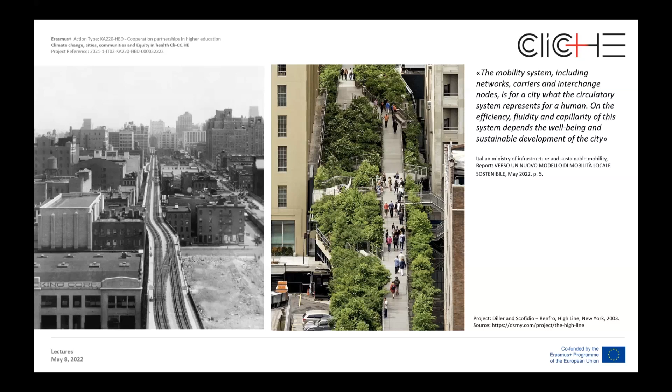My contribution, therefore, will discuss the practices of urban regeneration that start from the city's circulatory apparatus to revitalize its entire system. I will show two water infrastructure projects converted into new systems and new mobility. These two projects are about 20 years apart and work on a linear infrastructure and a port space. Both infrastructures relate to the theme of water and spaces of artificiality.

On the one hand is the regeneration of the drained riverbed of the Turia River in Valencia, an urban stitching between the city's historic center and an expansion area. On the other hand, we find the regeneration of Copenhagen's port infrastructure, in which the city, starting from the historic center, gradually expands to colonize, evolve, and claim its relationship with the sea. These two examples show different strategies of intervention within existing urban tissue.

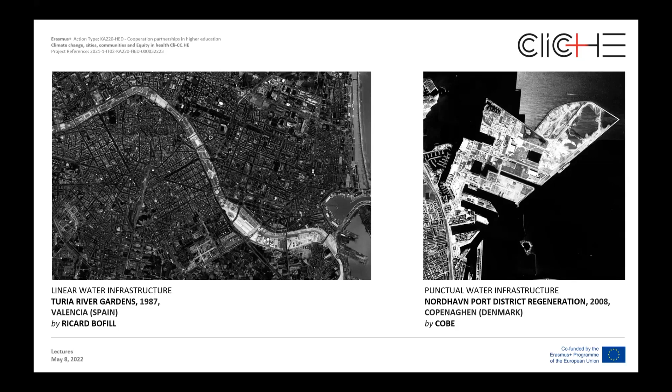The first project is the Turia River Garden, situated in Valencia, a city of Roman founding that is deeply linked to the waterway. Since the foundation of the city by Romans, Valencia has developed around the river. However, a river that over the centuries has caused numerous violent floods. The last and most violent was in 1957.

Valencia is subjected to devastating floods that forever changed the city's relationship with the Turia River. During this catastrophic event, nearly three-quarters of the city is submerged in the flood, and 81 people lose their lives.

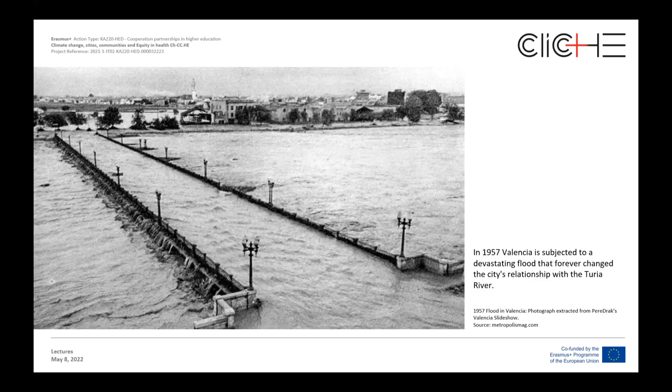After this crisis, it was decided to implement an ambitious plan and redirect the course of the water to the south of the city, the so-called Plan Sur, in English the Southern Plan. The Southern Plan was completed in 1969, and the course of the river that gave birth to the city was pushed out of it.

The deviation of the Turia River was done to remove the danger over the city from the seasonal flooding of the river, but left a wide strip of land running through the city from west to east along the historic city center.

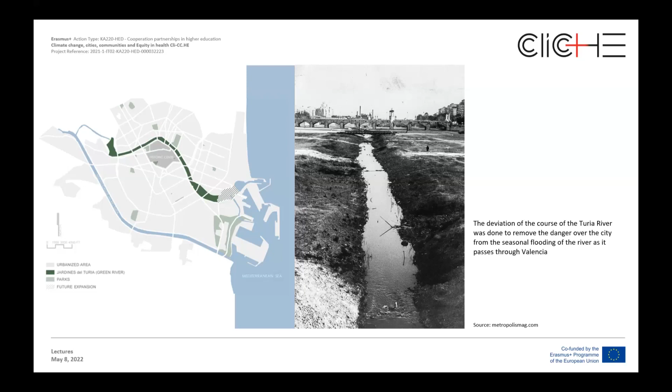This demonstrates that in urban regeneration intervention, acting over the common space and landscape, in addition to gathering financial resources or political desire, opportunities should be found to carefully adapt the landscape system to the perspective of the urban community settled in the place.

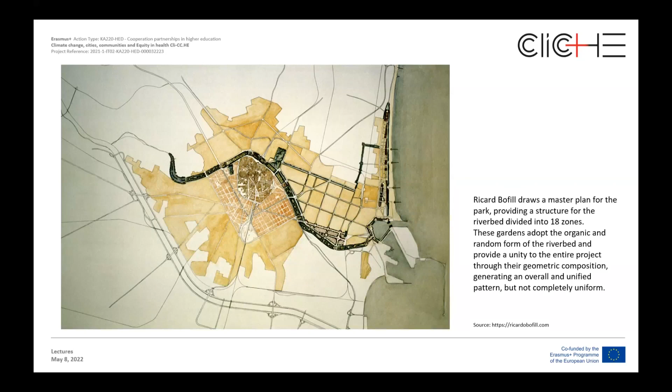Therefore, Ricard Bofill drew a master plan for the park, providing the structure for the riverbed divided into 18 zones. The design of a green space in the dry Turia riverbed first required an understanding of the city as a whole, its structure, forms, and functioning. The city as a framework for the intervention, and the riverbed as the city spine, were two basic concepts presiding over both the urban analysis and the design of the proposal.

The concept developed for the garden of the park is based on a philosophy of natural balance between resources and design, with a view to environmental sustainability, even though we are in the 80s.

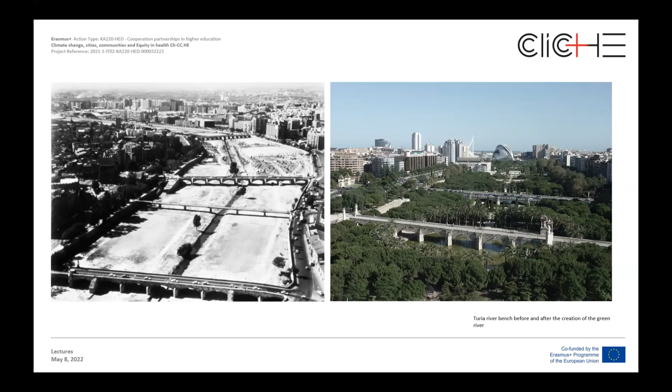The various areas of the park create different hierarchies of effects, and the vegetation used is local, such as pine, orange, palm, and olive trees.

The garden begins with a fruit forest and a lake that serves as both an irrigation reservoir, but also allows for sport and recreational activities.

In the middle of the park, there is a forum for the city. This is the main space where large festivals, shows, and parties take place.

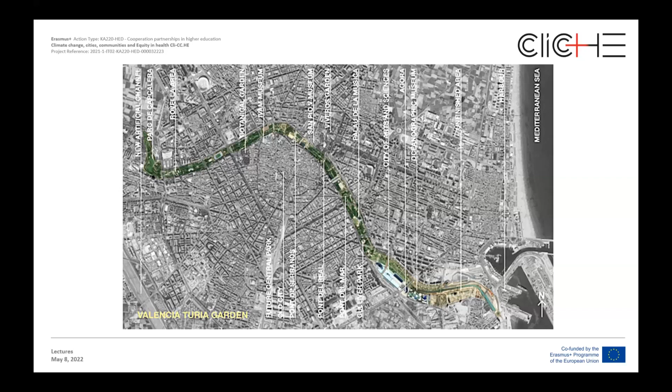In addition to the green and blue infrastructure, iconic buildings have become symbols of the city, which are the buildings made by the architect Santiago Calatrava for the City of Arts and Sciences Pavilion.

30 years after the project's realization, in 2017, a data team estimated the annual economic benefits to the city of Valencia represented by the Turia Park.

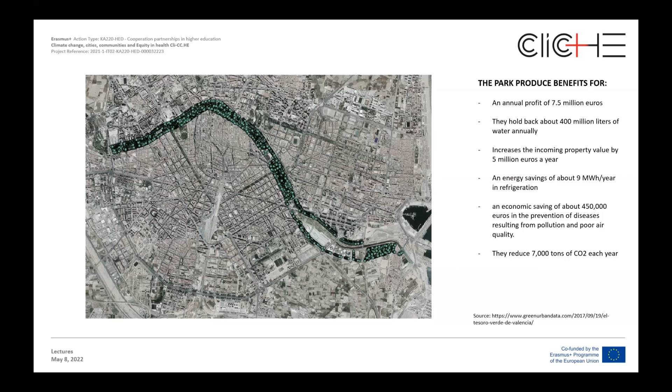Despite the time spent, this project is a fascinating modern example of the transformative effect of landscape infrastructure on a city's identity and well-being.

Born out of a crisis, Valencia has managed to integrate a recreational and soft mobility infrastructure network with its historical roots and surrounding neighborhoods. It's now difficult to imagine Valencia without its green river.

That project is in Copenhagen. Copenhagen is a city that met the challenges of climate change in an exemplary way over the past 13 years.

Among the various interventions made throughout the city, we focus on the regeneration of the port infrastructure.

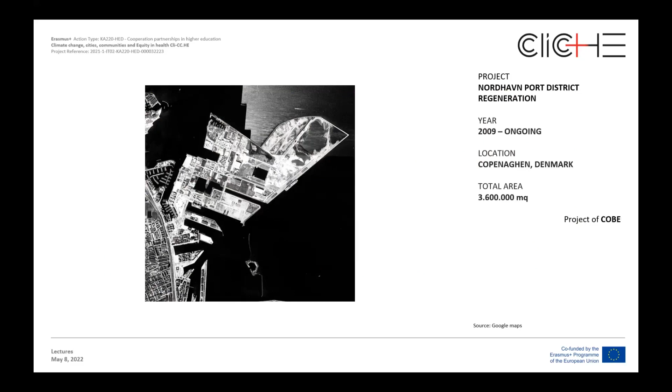The old port is one of the most historic areas of Copenhagen, where most of the industries of the past were located, and within the port, it was possible to find not only naval buildings, but also apartment and residential buildings, surrounded by canals and water basins.

As in most of the world's large industrial ports, with the advent of new boating practices, the industrial port district became outdated in the late 90s, and the area remained unused.

In 2009, however, the largest urban development project in Scandinavian territory, the Sustainable City of the Future, was presented — a major regeneration and redevelopment of the Harbour District, located just 4 kilometers from the city's historic center.

The project is the result of an international competition, and the winning project is that of the Danish architectural studio Cobe.

Sustainable mobility is the starting point for interventions already carried out in the city, aiming to create a carbon-neutral city by 2025, a human-friendly city with innovative mobility tools. The City Ring and metro system, inaugurated in 2019, is a loop running below the historic center, able to transport 72 million people annually. Future urban transformation projects, both public transport, subway and rail lines, and pedestrian and bicycle paths, must become the almost exclusive means of movement within the city.

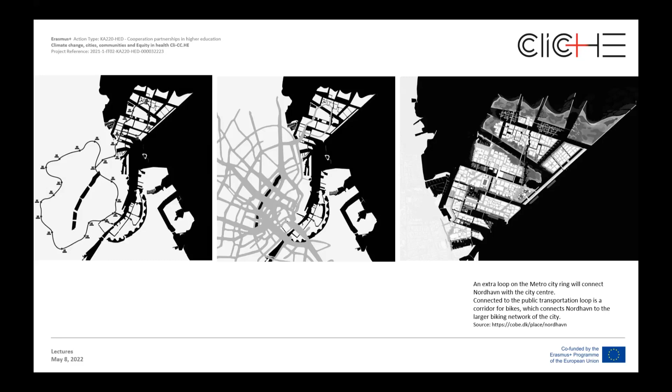To achieve this, the area is designed as a 5-minute neighborhood, where it takes no more than a 5-minute walk to reach a public transport stop. The project involves dividing the district into 11 island neighborhoods connected by navigable and swimmable canals. The planning of the islands is open-ended; they are planned one at a time. The master plan is not a vision of the city that specifies every detail, but rather flexible guidelines.

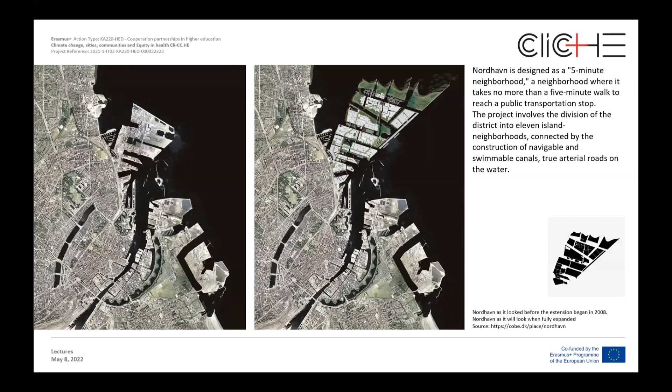The development plan for the neighborhood involves the construction of squares, pedestrian streets, and gathering spaces, all designed to make mobility and sociality easy. The buildings range from 3 to 6 floors to maintain the original character of Danish architecture, with the intention of giving water its role through the creation of promenades by the sea and a series of landing spaces and residences near the sea.

Mobility here is mainly characterized by the integrated use of subway and bicycle with public transport. The structure of the street is designed so that pedestrians, bicyclists, and public transport can move more quickly than by car. The streets and urban spaces have been designed and built as an intimate, pedestrian-friendly environment.

As we say, the starting point of the entire regeneration is thinking about mobility. Here, differently from Valencia, the new mobility is based on the joint use of bicycles and equipment for so-called soft mobility and public transportation. Therefore, metro stations take on a central role at both the programmatic and architectural level, acquiring a well-defined character. The first stations built include an underground station and a surface station, again by Studio Cobe, together with the company Arup.

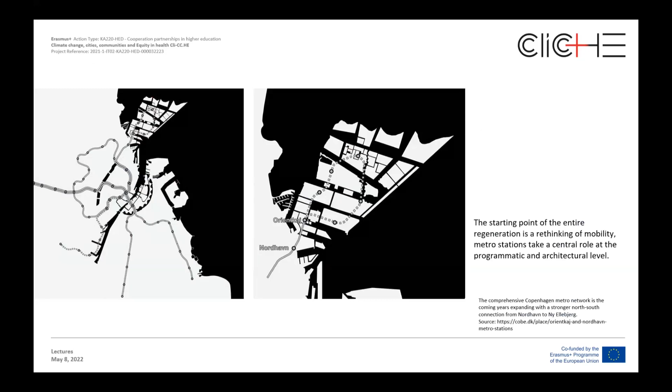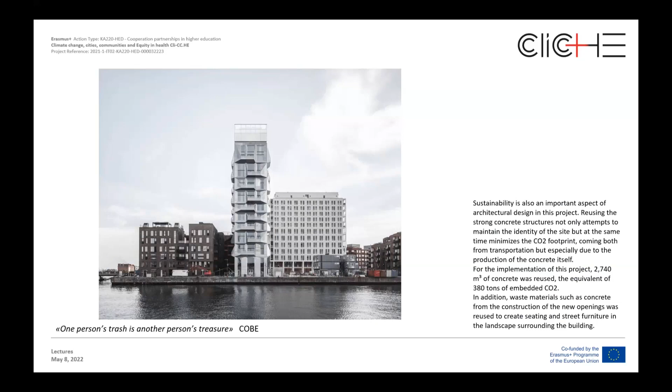No, I think... So the second part. Thank you. Good morning everybody. I'm trying to be very brief because Alessia took all my time. I'm joking.

So the argument is the shape and urban figures of the contemporary adaptive public space. That is something we saw a bit in the previous presentations, but I want to give you a different point of view to complete this argument a little. So the first question is: why open space?

Because we have three possible definitions of public space today. It's a connective infrastructure, because we see this fragmented condition of the contemporary city, this spread city all over the territory, and open space is the most characteristic element of this condition. It's a social infrastructure because it's the support of public activity, the place where humans carry out collective and public practices. And it's also an ecological infrastructure that can solve many different kinds of risks that we are often facing today.

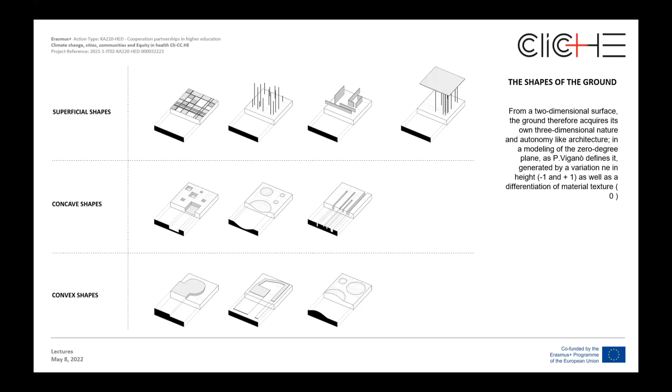So starting from the ecological side of the question, we can see how this brief catalog of adaptive solutions is strongly linked with the shapes of the ground. It's not important to dwell on this, but if we look at those classical solutions—floodable basins, wet ponds, water squares, rain gardens, and all those draining systems—most of these are nature-based solutions that use nature to face these problems, but it's also a problem of shape.

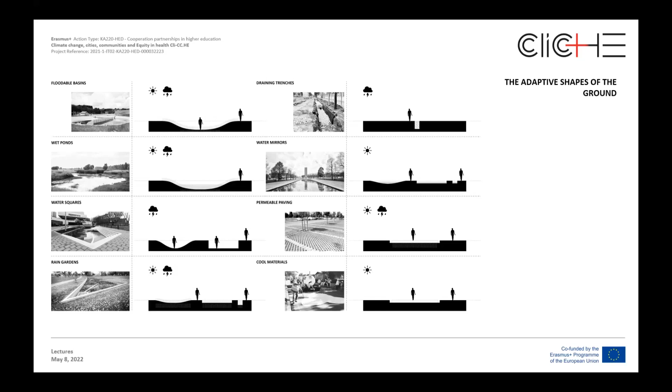So in this section, the shape of the ground is important to manage the water risk and also the temperature risk, because those two problems are somehow linked together. Other examples show how the shape of the ground is important to face those problems.

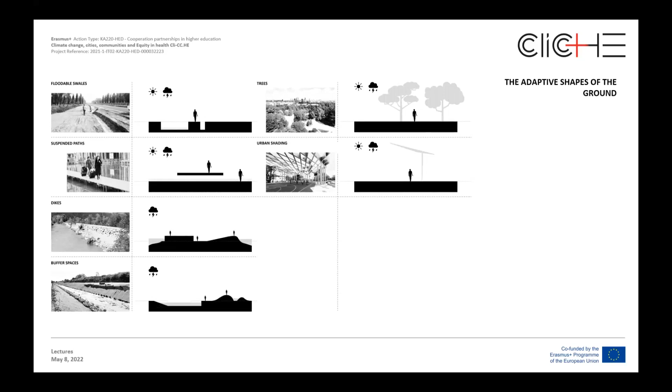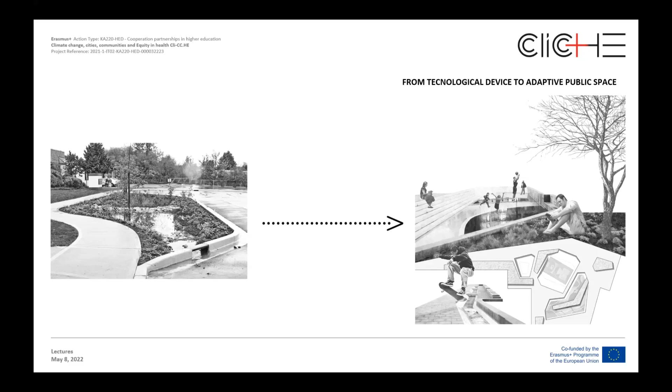So the question is, starting from this catalog, how to translate those technical devices and technical tools into something which is not only monofunctional stuff. So a technical device that should become a public space in the end, something that could work also in moments where the emergency or catastrophic event is not happening. So the aim is to transform technological and performative devices into public adaptive spaces, linking together the definition of ecological infrastructure and public infrastructure.

And the third question is how those public spaces can regenerate the city, and how it could be a sort of connective infrastructure, as I said before in the introduction. So we can figure out three strategies, starting from the small scale to the big scale.

So the frame is a punctual intervention in the city. The interface is a sort of space in between that links together two different conditions—it could be from the city to the agricultural landscape, to the riverside, the seaside, or a natural condition. And in the bigger scale, the intervention can connect different parts of the territory in a wider view, bringing together all the parts of the city and regenerating it.

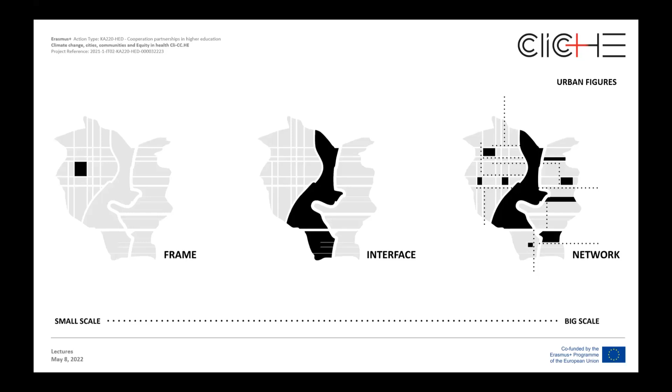So I want to share three examples, starting from the small scale to the big scale. Starting with the small scale, I chose a project which is interesting: the Zollhallen Plaza. It's in Freiburg, in Germany. The project was realized in 2011.

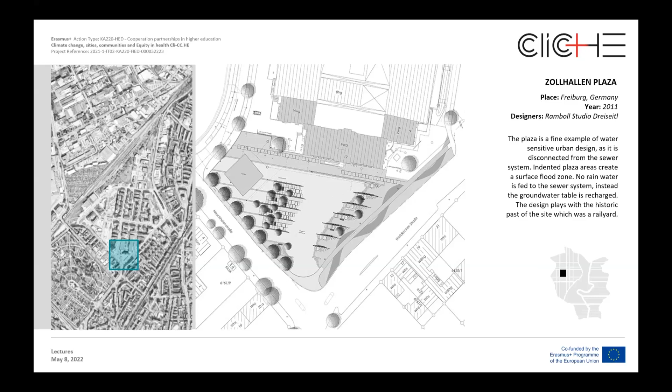Here you can see the map that shows how this point is a sort of urban void inside a strange and confused urban tissue. And this is the intervention—it's a project that works in this square. And those are the images. In the end, this is a rain garden, talking with a technical language.

And this is, let's say, a square that, as you can see in the schemes on the right, is a sort of security place for flooding relative to the rain. When the rain is heavy, this part of the square is floodable, and the other part is safe. So the water changes the way this square is used when the flood is intense.

But it can also be used in other moments when the emergency is not present. It's a beautiful place that is also linked to its history because it was next to a railway station, so you can see the rails in the pavement, which gives the design to this space. It's a public space, a classical square, let's say, but it works also in an adaptive way.

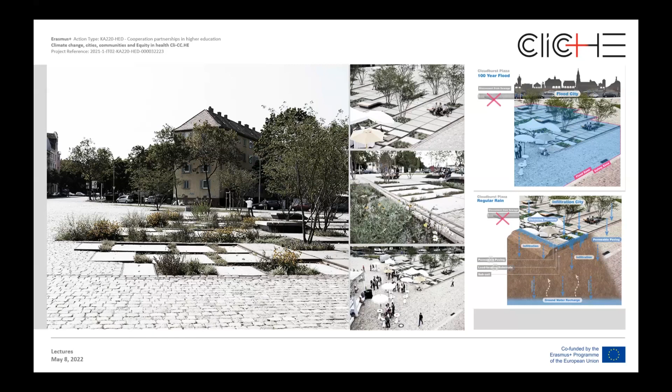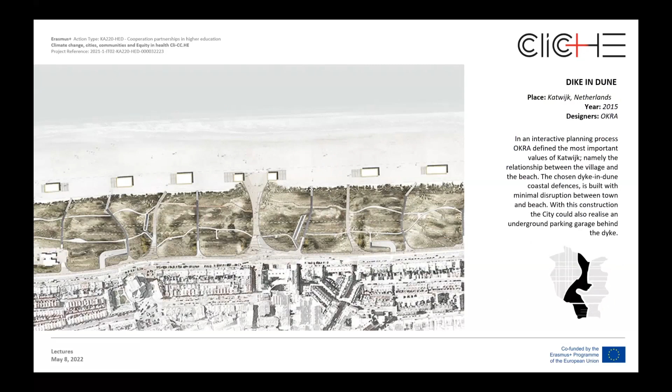This is the second one. It's about the interface, a condition between the city and the seaside. In the end, this is a dike, so it manages the water, protecting the city from the high level of the sea. This is the condition—a strip in between the beach and the city—and this is the solution. We can see how they use modulation of the ground with dunes that can build a public space. In the end, it's a public space linking the city to the sea, but it also has the capability to protect the city from the water of the sea.

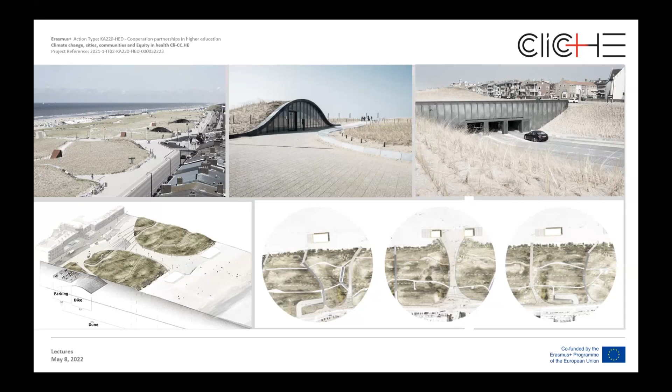So we can see also a parking garage below, underground. And this is the third one.

I chose Kokkedal Climate Adaptation. This is also in Copenhagen, and it's realized recently. This is a classical example of networking because it's a project composed of 35 singular interventions. As you can see in the map with those red dots, these parts are linked together to manage the water problem from the city to the river.

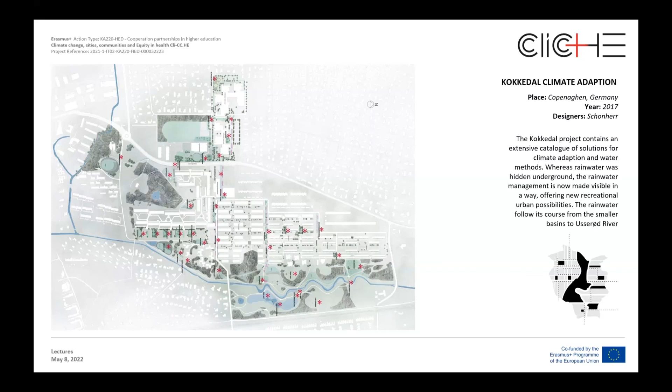So the water flows from small basins, and step by step they go to the riverside. And this is the condition—you can see the first row, the more urban photograph of the intervention. So you can see how the shape of the ground is important to configure this space in the adaptive way, but also as a public space.

This second row shows how the design changes as it adapts to the natural landscape of the river—everything, including places and shapes that are used for water management and also for public, collective activity.

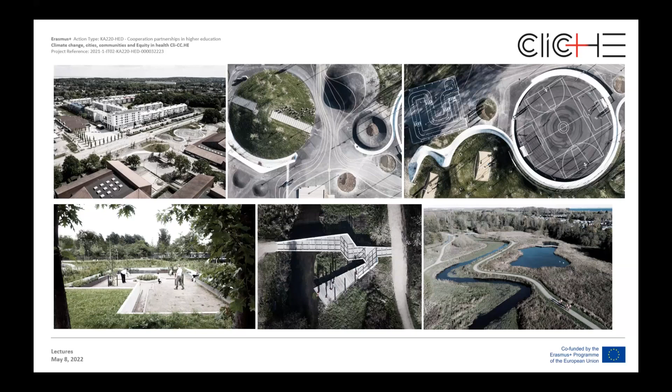So in the end, I want to leave you with a provocation, because we saw how the shape of the ground is important to make those three definitions of contemporary public space work: as connective infrastructure, ecological infrastructure, and it also has to have an aesthetic value.

And I leave the floor to Ludovica. I hope I was in time. No, not really. No? No.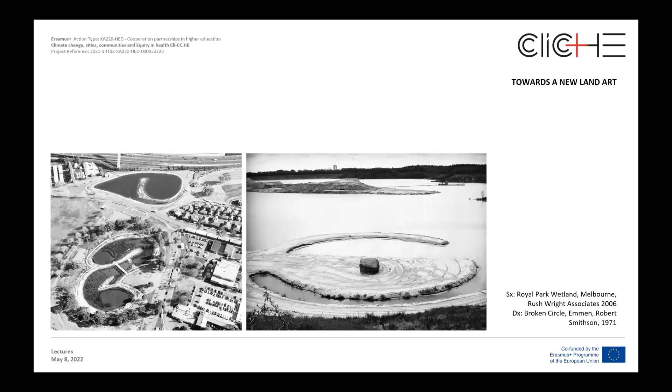I'm here only to stress the immaterial part of conceiving these regeneration processes, taking into account the communities. I want to repeat some key concepts presented before: the material actions we project for urban regeneration have to be enveloped with immaterial actions too. This leads us to respond to the conditions of participation, network, and temporal continuity that Europe has stressed in all the calls on this theme.

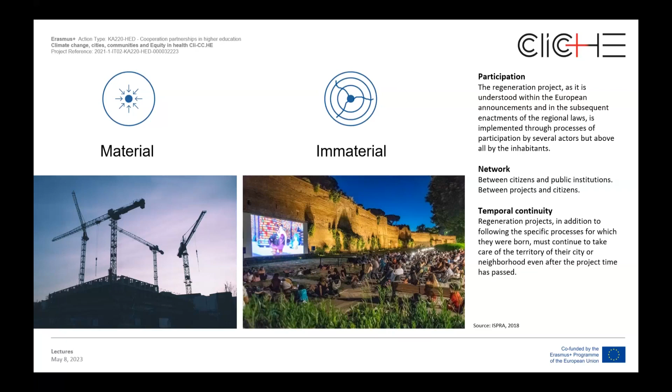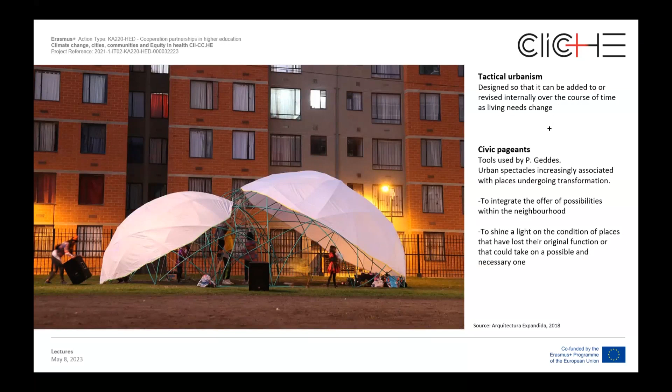So it's about conceiving the city as a space for experimentation, proposing a new living condition in which people learn to accept new assets—using the words of an important sociologist, somehow the disorder of the city through human experience. It does not exclude nor label, it does not eliminate unwanted behaviors, but aims to listen to them according to the principle of resilience. I will present briefly two examples of how the material part of urban regeneration can be approached as tactical urbanism, and the immaterial part as civic pageants, a concept used by Geddes.

These are principally bottom-up processes. In this project in Paris, the Arquitectura Expandida Association detected the most interesting places to start a collaborative way of thinking, reclaiming the public space directly from the community.

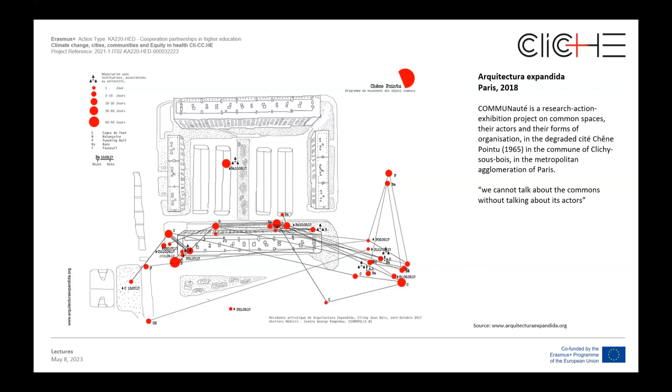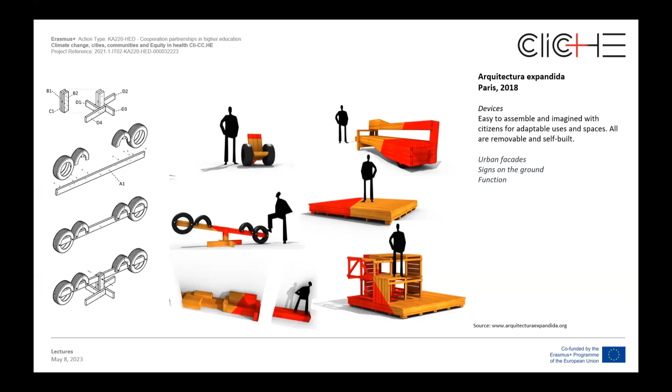As this quote says, we cannot talk about the commons without talking about its actors. So they used devices that were easy to assemble, designed directly with citizens, and adaptable to different uses of space. All were self-built and could be easily repaired and moved. These constructed pieces were very simple interventions in the space.

The second approach intervened on the ground floor of urban facades, making it easy even for children to participate in the realization, working on ground connection and integration of urban dispositives. The last were signs on the ground that help people think about reappropriation of public space, reclaiming space from car mobility and other devices.

All these strategies focused on new functions. So essentially, it's the direct intervention of residents who can change uses, move dispositions, and free up areas where they can organize community events freely.

The second and better-known project is in Milan. It's not exactly a bottom-up process, but a bottom-up approach promoted from above—a new way of conceiving bottom-up processes in order to let them grow with more funds and more efficient action in the space, with Strade Aperte in Milan from 2018.

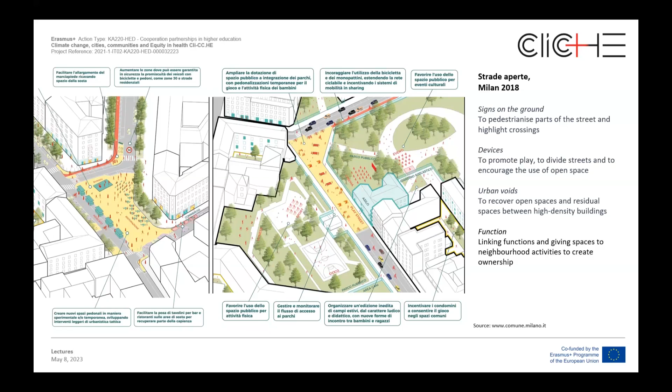You saw some pictures that seem not so fascinating, but that's because tactical urbanism processes have a temporary conception. So where the tactical approach proves more efficient, the municipality intervenes with more funds and more structural intervention, like this one.

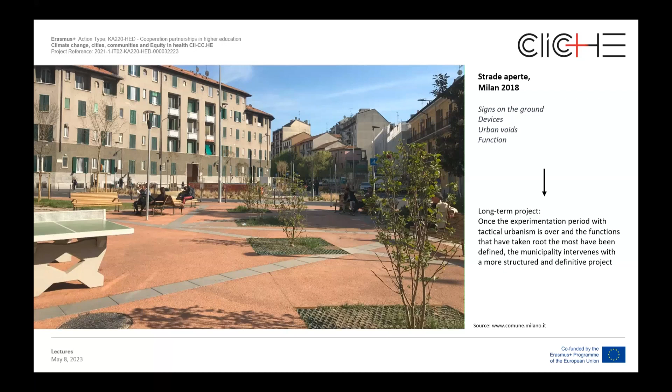So, concluding this lecture with so many different cases, it's important to take these regeneration processes as an important living step of the city, embracing all the complexity of the subjects living in the city and all the problems we are facing nowadays. Thank you very much.